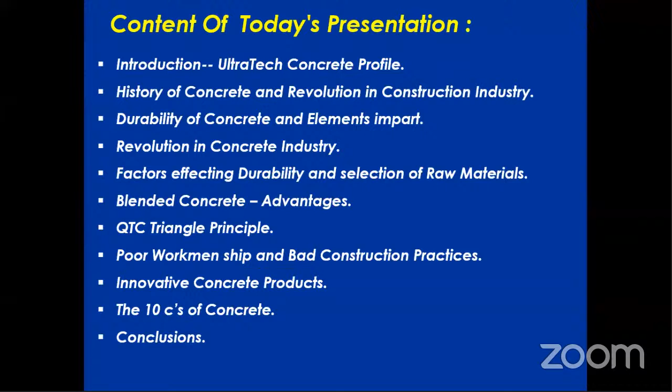Today's content will be briefly these contents which I want to cover. As I am basically from Ultratech Cement Limited unit, Ultratech Concrete, so a brief two slides for introduction of the company's profile, what is the history of concrete, and what recent revolutionary changes occurred in the construction industry that affect the phase of construction and durability of concrete.

And what elements are important to get durable concrete, revolution in the concrete industry, factors affecting durability, and how selection of raw materials will play a major role in getting durability, what is blended concrete and its advantages, and the QTC triangle principle, and workmanship - as we visit 3 to 4 sites daily in our core job profile, I am going to show you various pictures where workmanship is lagging, and how that affects structures, plus innovative concrete products, and finally what are the 10 C's of concrete, and with conclusions I want to conclude the session today.

So quickly I'll wrap up the session.

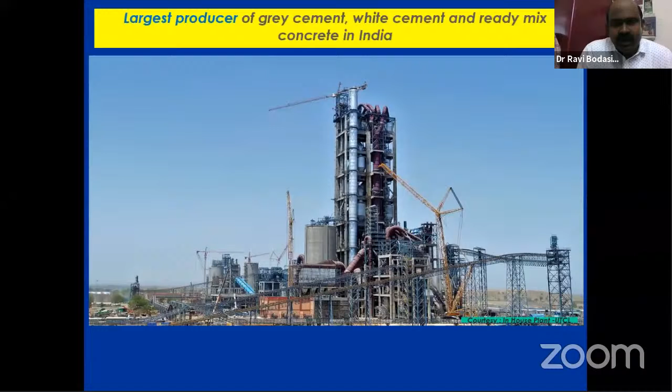We are the largest producer of grey cement, white cement and ready mix concrete across pan India, with 113 million tons of capacity per annum across all our cement manufacturing units, and we have more than 100 ready mix concrete plants in 36 cities.

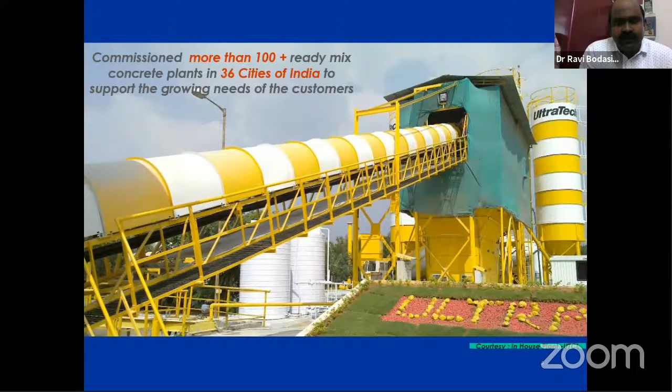We have well established centralized batching plants for giving tailor-made products to our customers, whatever is required, whether specification concrete, product-based concrete, or performance-based concrete. We have all tailor-made products readily available, and we supply huge quantities of concrete for the better building of the nation.

So coming to the history of concrete, the Portland cement was actually invented by J.S. Aspdin in 1824. He was a core engineer from England. So he invented the Portland cement.

Why was it given the name Portland? In the area where he stayed, there is a natural rock which resembles the surface finishing of the cement. So the Portland name was given to the cement, and from ancient days we have called it ordinary Portland cement.

So that makes it the second highest and largest consumable product in the 20th century - concrete. Later, the relationship between the water cement ratio, degree of hydration, and porosity was established by Powers in 1964. As I discussed in the earlier slide about what is high strength, we've moved from the strength concept to the performance concept.

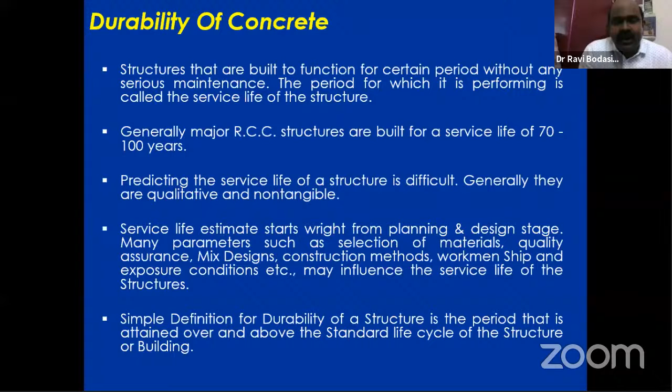So the simple definition for durability of a structure is the period attained over and above the standard life cycle of the structure or building.

So concrete, as all of us know, is a combination - a simple definition being the combination of cement, water, coarse aggregate, sand, fine aggregate, and admixtures.

Following are the factors that will affect concrete quality: the variety and type of materials based on mix proportion and batching. Why? Because we produce concrete in two methods - one is site mix concrete, one is ready mix concrete.

So how the mix proportion is taken care of, and how the batching of concrete is handled at the RMC plants, along with environmental effects and construction practices like workmanship and which technology you use to construct your project, and the target objective of the concrete.

What is the target objective? Target objective is nothing but the grade of concrete, what workability is required, and what is the time to start and finish the concrete.

These are all the factors that give concrete good quality. But if we miss any of these factors, the properties of concrete will immediately get affected because these factors have not been considered or treated well.

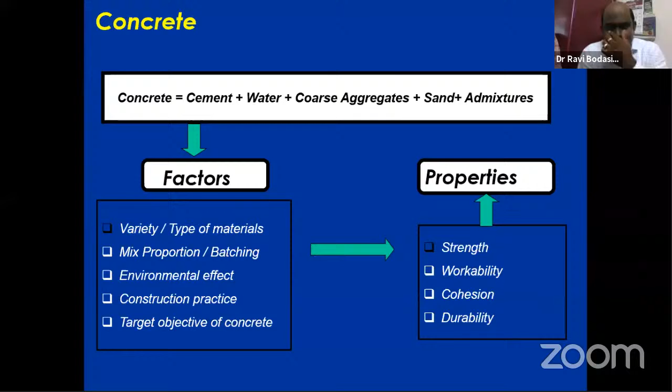So that may cause low strength, workability, cohesion, and durability issues. So these are all the factors. But what are the elements that will affect the concrete durability?

So we are now discussing not a standard concrete. We are purely talking about how we get the durability and how we get the life of the structure above the standard life. So these are the durability factors: the concreting system, and the aggressiveness of the environment.

So concreting system is again bifurcated into materials and process. Why? Because without materials we cannot produce the concrete. The materials involve what is the binder type - binder is nothing but our cement content. Binder content, what amount of binder content you are going to impart in your mix design, what is the quality of aggregates, what type of admixtures you are going to use, and what is the mix design - whether it is designed for M20, M25, and whether it suits the codal requirement or not. These all come under your mix design and materials.

And the process is nothing but how you are going to mix the materials, how you are going to transport, and how you have to place the concrete in the element - compaction, curing, temperature, workmanship, and the aggressiveness of the environment. These are all concrete system.

This will be under control. Why? Because materials we can control, process we can control. This is exclusively something we can correct - the entire concrete system. It lies within our hands.

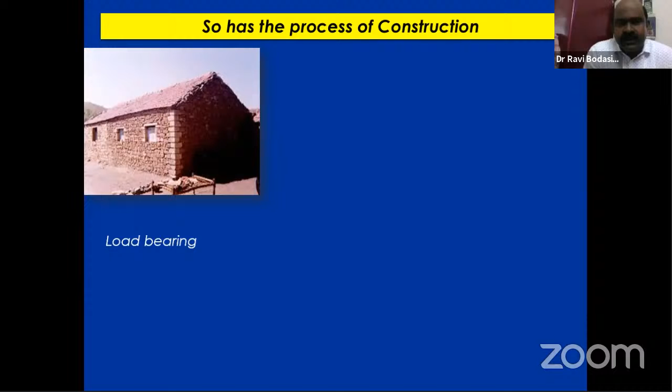Later, from load-bearing, the industry shifted to the framed structure. Framed structure is nothing but our columns - basically starting from footings, plinth beam, columns, slab. From the slab, it is a symmetric structure. That entire frame - first we will construct the frame or skeleton of the structure, then we will go for the other masonry and other conduit works.

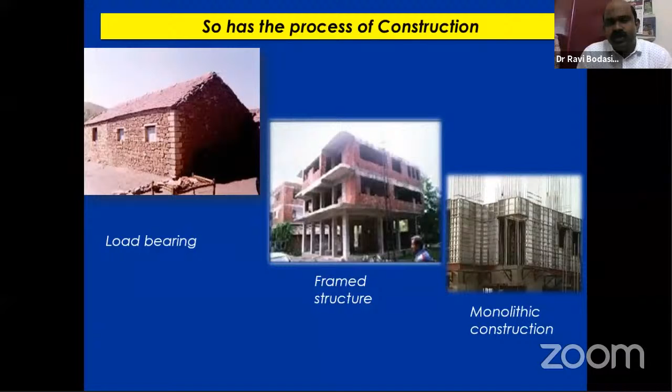And even now, from framed structure, the industry has shifted to monolithic construction. Monolithic construction in simple definition means: if once we have planned and scheduled a time to complete a slab area or whatever wall area element, once the concrete has started, it should be finished off without any joint or obstruction during the laying of concrete. Once you have started the wall, it should be finished without any joints, without any time delays. That is called the monolithic construction technique.

Earlier we used site mix concrete, purely based on volumetric analysis like 1:2:4, 1:3:6, 1:4:8 - that is the volumetric analysis of site mix concrete. Whereas ready mix concrete is purely based on IS 4926 codal practice with weighment analysis. So for 1 cubic meter of concrete, we convert the entire volumetric into weighment analysis - how many kgs of cement required, how many kgs of aggregates required including fine and coarse, and how many kgs of minimum water cement ratio - everything will be defined as per the tables given in the codal practices.

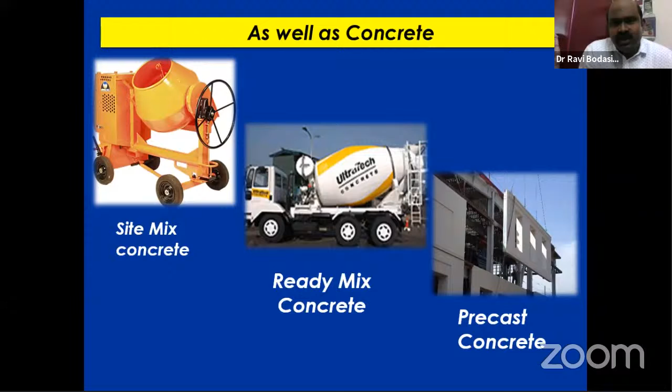So ready mix concrete - now we can see a lot of activities. Even ready mix concrete has now shifted into precast concrete. It saves a lot of time with precast concrete. We can cast our elements - whatever wall elements, even footings, beams, columns - everything readily available at the precast yards, and then transport and fix the elements onto the structure. This is the precast technology, now well established in the construction industry.

So what is the revolution in the concrete industry? As you know, even in 2-tier and 3-tier cities, the apartment culture has been very well suited, and the real estate boom is now looking for high-rise buildings. Huge competition is there in the high-rise sector. In order to stay in this competition, the builders or developers are hard pressed to complete the project as fast as possible.

One builder will think: okay, my co-builder has constructed 11 floors, I have to construct 15 floors, I have to construct 20 floors. Like that, a big competition has resulted, knowingly or unknowingly, where the builders or civil engineers violate various building norms, so that entire violation leads to failure of structures, and even the structures are unable to attain at least the designed service life of the structures.

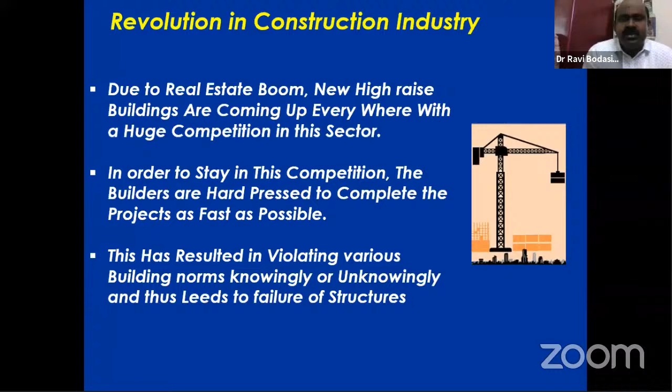So the Indian construction industry, earlier and now. Earlier days there was low demand for construction, and government was also spending low on infrastructure. But now, as you see, AP TIDCO projects, Prime Minister Awas Yojana, and other schemes mandate that every family should have one double-bedroom house. That is the aim of the government, so that every family should have their houses. Availability of land was also adequate earlier, but nowadays land availability is becoming narrow, and that is also the reason prices are high.

Shortage of cement was there earlier, but now, as I said, we are at 113 million tons capacity per annum, so surplus cement production is there. Labor was also cheap earlier, but nowadays labor availability is the toughest job for us as an industrialist, to get skilled and semi-skilled labor. Because of this migrant labor situation in the pandemic, daily our toughest job is how to get the manpower into action. So these are all about the construction industry.

What earlier in India, now what the construction industry in India is looking at: need for faster construction, sustainable and durable construction, latest technologies. We have even appointed multinational consultants from Singapore and other countries for better durability of structures. Various countries have been involved in getting good quality buildings.

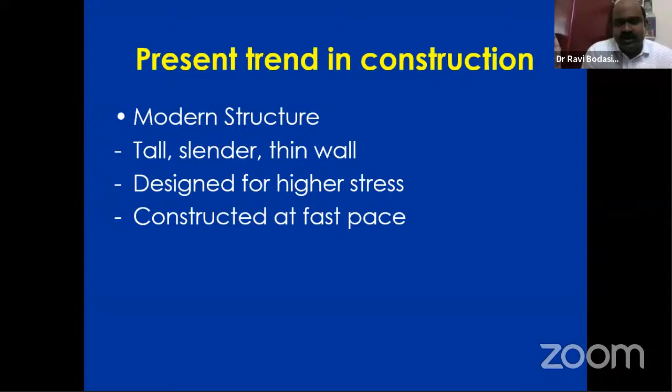Why? Because to get the project done in time, they are looking for high quality, high strength concrete, and the structure would undergo some high stresses. All these, the basic aim of this trend is to construct at a fast pace.

So, the revolution of making concrete over decades. Over decades, standards have been given that normal concrete we can use up to M20 grade - what we call normal concrete. Even IS 456, in its recent revision, says M20 should also be considered as plain cement concrete, not RCC, if it is in a pure coastal region. Then standard concrete is M25 to M35, and high strength concrete - what we normally call M40 and above - denotes high strength concrete. Various buildings and projects require M40 and above concrete.

Then the concept of high performance concrete - as we didn't stop at the strength part, we started looking at performance concrete, and blended concrete came into life, and extensively it is giving better results.

With blended concrete we can get the best durable structures and special value added concrete products. This is purely on application and product basis. If you have some specific requirement in the project, or a specification that wants some particular product, we can produce that product based on the customer requirement and supply the concrete.

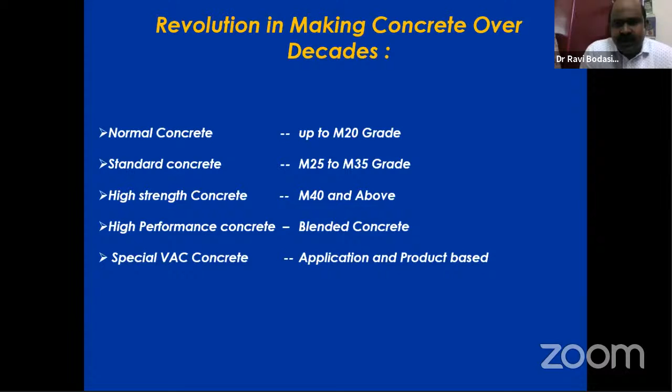So coming to the details of today's presentation: what are the factors affecting the durability of reinforced concrete? These are the major factors which impose the life cycle of the building: design deficiencies, environmental conditions, sulphate and chloride attacks, corrosion of reinforcement in the concrete, carbonation and leaching effect, alkali aggregate reaction, thermal damage, plastic and dry shrinkage cracks, joints, quality enhancement of concrete using blended materials, and finally workmanship.

We'll just go through one or two slides of each component so that we'll have a brief idea about what are the factors affecting the durability of the structures.

Coming to design deficiencies - actually in the case of planning itself, as civil engineers, structural engineers, or architects, first they should study what design is required for the structure, and what tensile strength and compressive strength it requires, so that both can give strength to the building.

It should take care of the entire load coming onto the structure. In metro cities or tier-A cities, after finishing, the owner or developer used to give the terrace on lease or rental basis for huge hoardings. These hoardings' weight, wind load, and dead load will not be taken into consideration by the structural engineer during the design aspect.

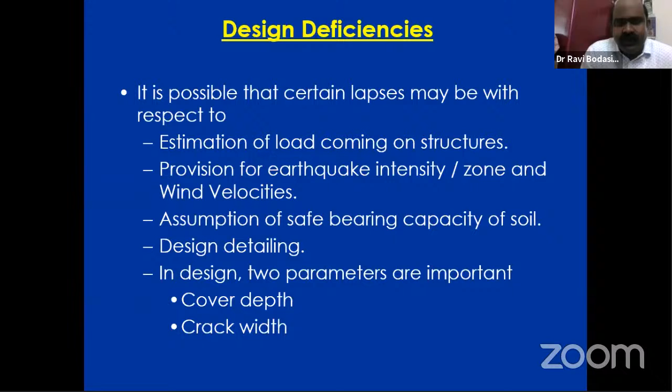These are all factors which are non-tangible and we cannot identify. Even after construction, the structure will take continuous loads throughout the entire designed period, so we cannot assess what stress the structure is facing. So these two factors require adequate care.

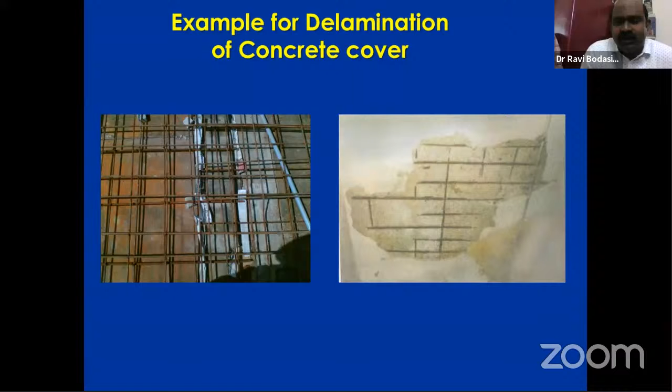You can just see the photographs—the proper cover is not given to the slab, so after de-shuttering, this will be the condition of the slab. So definitely we are giving whatever remedial course of action for the damaged portion, but it won't embed itself and act as a single element. Both will have individual elements and individual stresses, so year on year it requires rectification.

For this, normal cover has clearly been given in the IS 456 codal specification, based on 5 severe conditions. When taking care in the design aspect, we have to consider the criteria that the structure or soil will face. It comes under exposure conditions like mild, moderate, severe, very severe, and extreme. Based on these exposure conditions, we should finalize the cover to the main reinforcement.

If it is mild, a 1 inch cover or less may be sufficient for the structure. Whereas moderate requires a minimum of 30mm, severe 45mm, and very severe 50mm. Extreme severe applies where construction has been done underwater or under sea, like ports and similar projects—this falls under extreme conditions, and we have to go for 75 mm cover for the reinforcement.

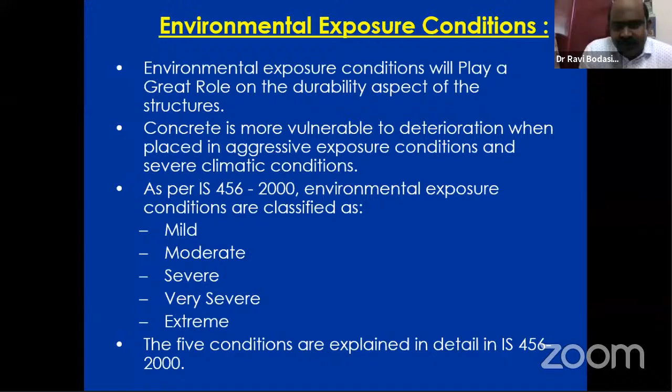So environmental exposure conditions play a greater role in the durability of the structure. Why? Because concrete is the most vulnerable or first affected element in the entire structure when aggressive exposure conditions and severe climatic conditions cause the concrete surface to deteriorate fast. As we discussed about these 5 environmental exposure conditions, the design criteria should meet the requirement of the life cycle of the building.

So coming to sulphate attacks—sulphate in the form of calcium, sodium, potassium, and magnesium all naturally occur in groundwater. Even in soils, some soils, like in any industrial area, because of effluents coming from industry, the groundwater may get affected, and eventually with the groundwater, the soil holding that water also gets contaminated with these chemical contents.

So solid sulphate will not give any impact if that is the reason we are giving our footings—we directly excavate, construct a footing, and immediately backfill the footings. So even in that area, the sulfates or whatever chemical contents are present remain in solid form.

So this solid form will not get that much effect to the structures. But whereas when these are all contents mixed in water, and if water is being percolated through our structures with porous and weak junctions, then definitely the sulfate attack will cause a big problem to the structure, and it will increase the volume of the cement paste.

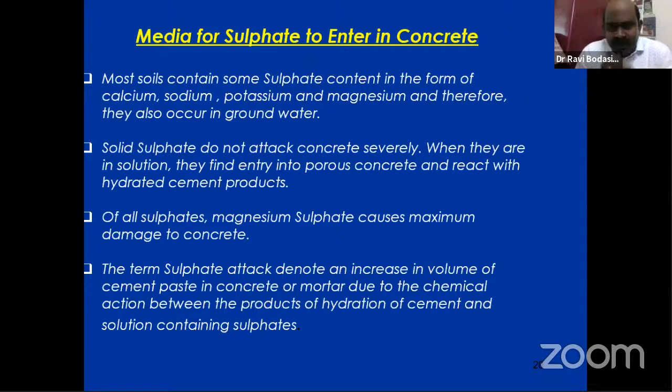So you can see why, because when we are designing, consider the ASC, which is nothing but area of steel versus area of concrete. If the bulging of concrete occurs because of the sulfate, then definitely the concrete surface will deplete from the reinforcement and get departed from it. So because of this increase in volume, gradual disintegration of concrete occurs as the sulfate attacks the reinforcement, and the dilution of concrete takes place gradually. It will start at a slower pace, but after some period the effect will be more.

So it is to be noted that sulfate is the most potent enemy causing lack of durability of the structure. In IS 456, it is clearly mentioned what are the permissible limits, even in the water which we are mixing in concrete and the water which we are using for curing. So all these limits have been clearly mentioned.

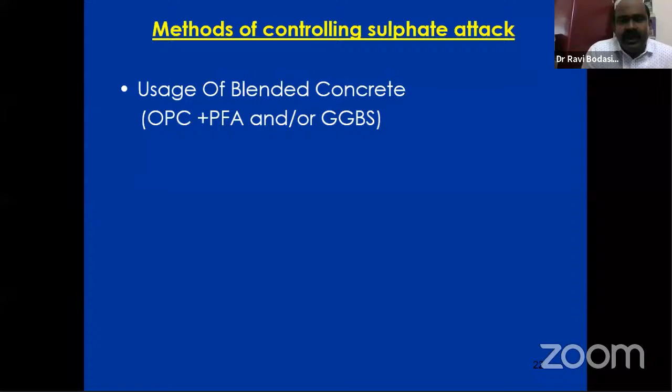So methods of controlling the sulfate attack: use of blended concrete, that is OPC - we can go through detail in the next slides about this blended concrete. Also, quality of concrete, low water cement ratio, well designed and compacted for dense concrete. Once the concrete is properly compacted, the entire entrapped air will come out, and you will have a dense and solidified concrete, so that it won't allow any water to percolate through the element.

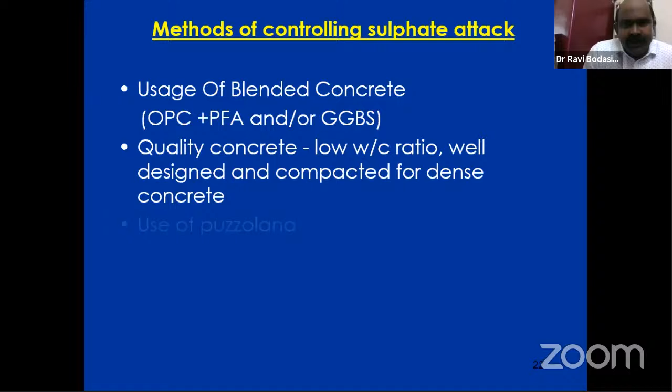So use of pozzolana, high pressure steam curing. So coming after sulfate, these are all the twins which affect the concrete to get more and more deterioration at a faster pace. One is sulfate and the second one is chlorides. Chloride enters the concrete from constituent material, from ingress and diffusion from the environment.

As environment, chloride attacks the protective passivity layer, which is self-generated on the surface of the steel in the hydration process. Hydration process is nothing but when H2O, water, gets in contact with cement, immediately the hydration, the exothermic reaction will start, and the hydration action forms a cement paste. That layer will form over the steel.

As a result of corrosion, the increase in volume causes the surrounding concrete to get damaged. So these are all the limits given: up to 0.2% by weight of cement, chlorides, no risk of corrosion; 0.2 to 0.4, low risk; 0.4 to 1% by weight of cement, moderate risk. If more than 1% by weight of cement, say for example you are using 300 kg, so 1% would be 3 kg - this gives high risk of corrosion.

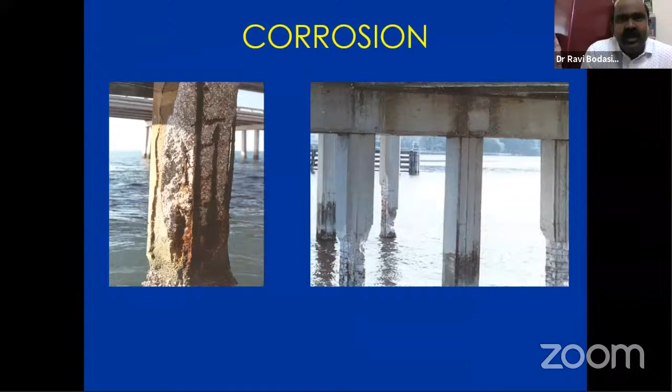So once the corrosion starts, corrosion is nothing but what we can say, it is nothing but a cancer to the concrete.

So this is the phenomena of how corrosion takes place. It's simple: the reinforcement can be tested with an anode and cathode method. So the H2O gets reacted with our cement, and this ferrous oxide will develop more and more. Once the repeated anode and cathode ionic action occurs, it gives more ferrous oxide.

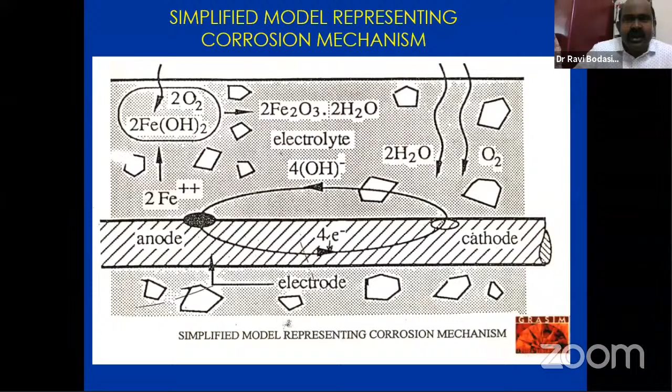It becomes an enemy to the reinforcement which gets corroded. And even once a single oxygen atom reacts, the corrosion plays a major role.

So see the volume, if you can have a look, what is ferrous and ferrous oxide and all these elements - year on year, once corrosion starts with a single Fe ion, after the hydration action, it will react with the moisture to form ferrous oxide, like that. Once the volume goes on increasing, the condition of corrosion gets more and more severe, and after some time, we can only have the impression of the steel on the slab, not the actual steel. The entire thing will get rusted and it will fall down.

So how to get rid of this corrosion? Making good concrete, adopting low water cement ratio, good compaction for concrete, curing practices, and using correct admixtures. Why? Because some admixtures also have some suspended chlorine content, chloride content, and sulfur. So use of correct admixtures for the correct cement you are using - you have to check for the compatibility test for admixtures versus the type of cement you are using.

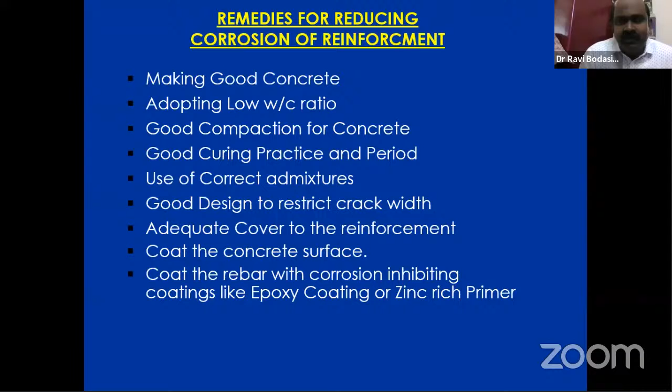Adequate cover is important because the more the cover, the more the lifespan of the structure. Without it, the anode and cathode reaction will start. Even if the cover is more, the time to reach the reinforcement will be dragged, giving a better life of the structure.

The next major factor affecting concrete structures and disturbing durability is carbonation. Carbon dioxide from the air reacts with calcium hydroxide to form calcium carbonate. In presence of moisture, this acid is formed which reduces the alkalinity of the concrete. If the pH value of concrete, generally 12.5 and above, comes down to 12.5 to 9, it immediately affects the protective layer of the steel, and the carbonation action starts deteriorating the steel.

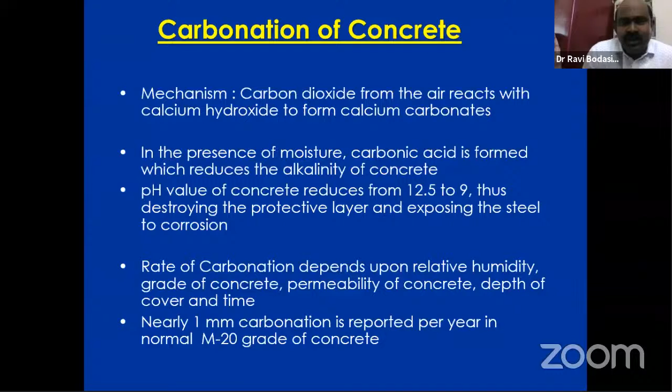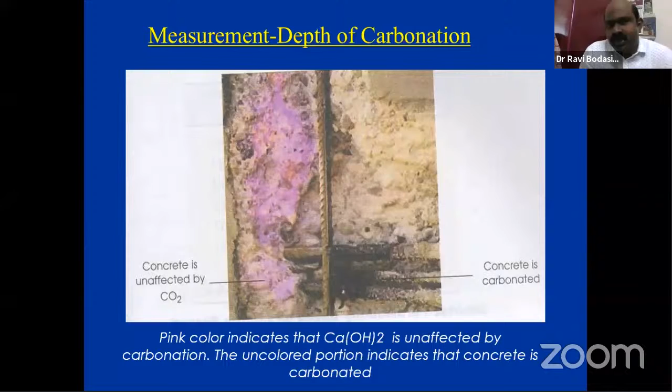So, methods of controlling carbonation: the highest rate of carbonation occurs at a relative humidity between 50 and 70%, so humidity plays a major role. Often this factor is not considered - what is the humidity, what is the wind velocity on the pouring day - it plays a major role.

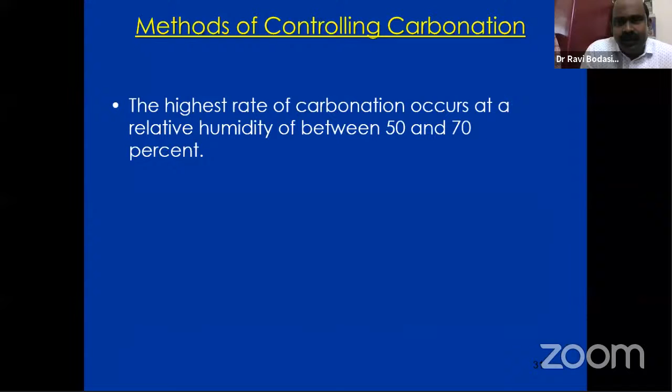Protective coating is required for long span bridges, flyovers, industrial structures, and chimneys, because these structures undergo chemical action inherently throughout all 365 days. So depth of cover plays a major important role in protecting the steel from carbonation.

The next major effect is alkali aggregate reaction. Alkali content in cement reacts with reactive silica of the aggregates used for manufacturing concrete. This reaction forms a gel, and once this gel manifests, it allows bulging of concrete and gives cracks. As we know, a crack is the first door that allows our structure to deteriorate at a faster rate.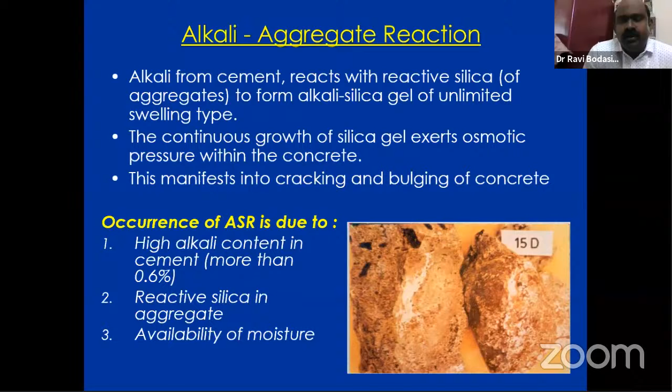Occurrence of alkali silica reactivity is due to high alkali content in cement; as per MORTH specification, it is limited up to 0.6%. Reactive silica cannot be controlled in the aggregates, as these are all natural products which we are crushing and using.

So what is the remedial action to address alkali aggregate reaction? Use of non-reactive aggregates from alternative sources - if the aggregate is more prone to this silica reaction, we have to go for other sources of aggregates or raw materials. Other options include low alkali cement, reducing cement content in the concrete, use of pozzolana, slag or silica fume, and control on service conditions by limiting the degree of saturation of the concrete.

Once concrete is placed, after about 1.5 hours when the hydration action starts, it forms a green state, then plastic state, then hardened state. In this phenomena, some silica reaction occurs. So the degree of saturation of concrete plays a major important role, and this can be controlled by using proper admixtures.

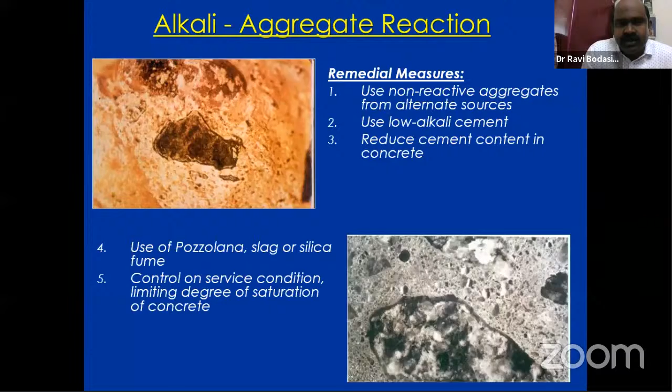Next is the effect of leaching. You can see in buildings, if untreated at the soffit of the slabs, white color patches will appear - this is nothing but leaching. The free lime in the concrete comes out after a certain period and deposits on the surfaces of the concrete elements.

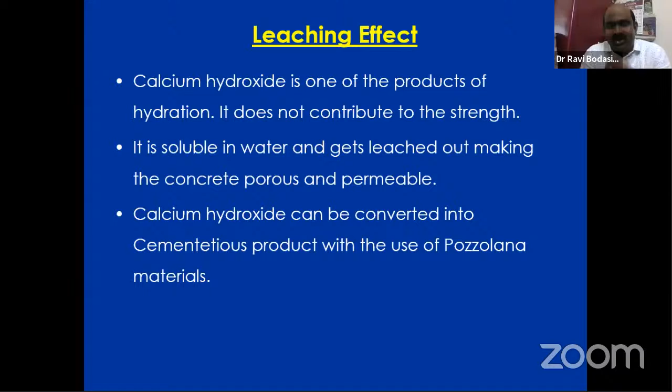Next, coming to thermal effect.

So the temperatures while placing the concrete for huge massive pours, definitely the thermal effects, the exothermic and endothermic reactions, occur in the massive pours and will definitely affect the concrete. This can be controlled while pouring the concrete by considering the temperature of the concrete and by cooling the aggregates and placing temperature. All these things help control the thermal damage, which has a major effect on the durability of the structure.

Thermal cracks develop if the temperature difference between the core and surface of the concrete is more than 20 degrees. Say you have poured a 1.5 meter depth raft. We always look at the surface temperature of the concrete, but what is the temperature inside, inbuilt in the concrete at the bottom layer? That also plays a major role, which is why extra care is taken when massive pours are involved.

So we have to ensure there are no joints and no cold joints, and the temperature should be maintained well within 27 plus or minus 2 degrees while pouring the concrete. For that, what are the remedial measures?

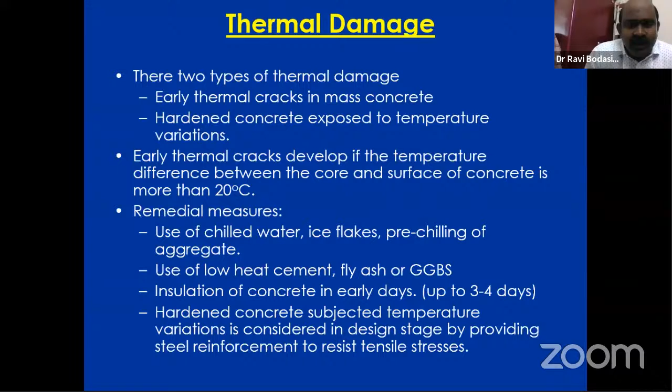Then the major thing we are always discussing is cracks. Cracks are the major prone areas where concrete tends to crack. There is a saying in the civil engineering industry: good concrete always cracks, but how to mitigate these cracks, or how to limit plastic shrinkage cracks, dry shrinkage cracks, or settlement cracks, is what matters.

What is freshly placed concrete? It loses its water because of the internal hydration action, which gives off temperature and causes loss of water. The hydration is similar to how, in summer, we human beings lose our salt and water. Immediately we take some ORS or some liquids to compensate for whatever is evaporated or lost in salts and water. The same phenomenon causes concrete to lose volume, resulting in shrinkage.

During shrinkage, the concrete undergoes some stress, and ultimately when the concrete turns from plastic state to hardened state, the settlements will not be borne by the concrete, as you have to treat fresh concrete like a baby — it cannot take heavy loads. Any undergone stresses will definitely impart cracks which form on the surface of the structure.

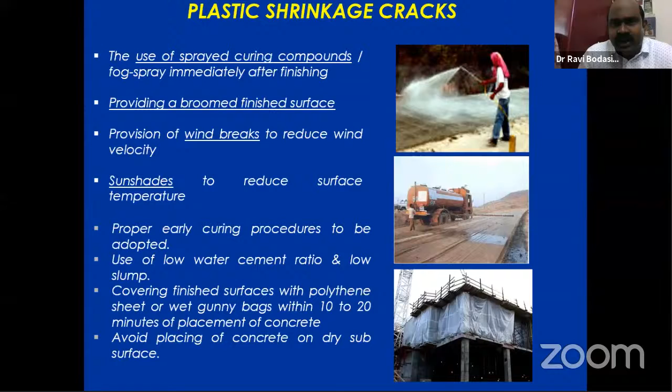Why? Because when we place concrete on dry subsurfaces like roads, the element acting as a subsurface will absorb the water in the concrete immediately after placing, and the water will not remain in the concrete to react with it. That is the reason plastic shrinkage cracks may occur.

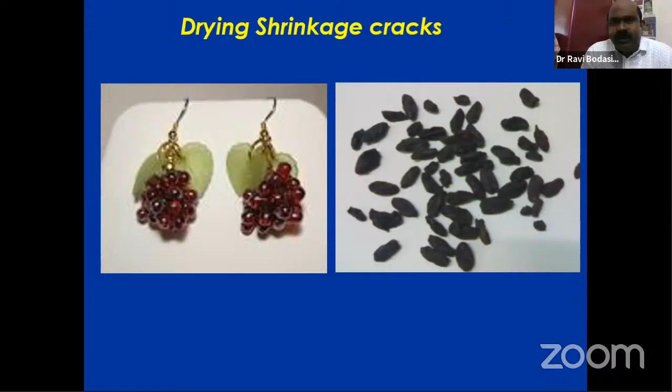Next, coming to dry shrinkage cracks. This picture shows grapes in a fresh state and after losing their water. Why? How the volume of the grapes and the space between them changes clearly denotes the same phenomenon. Dry shrinkage, after losing water volume in the concrete, tends to cause cracks — that crack is called dry shrinkage.

Similar to the hydration of cement, dry shrinkage is also an everlasting process. It is due to the loss of water in the gel pores and the change in volume.

The magnitude of shrinkage depends upon the cement content, the maximum cement content, and the constituents used. Are you using any mineral admixtures? What is the water cement ratio? What is the humidity factor?

All this will affect your dry shrinkage factors. So remedial measures like good quality aggregates and prolonged curing for concrete is mandatorily done for at least, as the code says, a minimum of 7 to 10 days. Why? Because in 7 days it should reach at least two-thirds of the design strength. So for a period of 7 to 10 days curing is required.

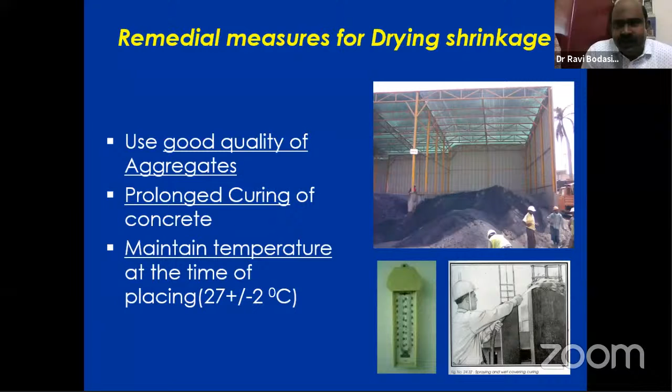But even though, within the next 2 to 3 days we are all forced to stop, because we need to take up the next phase of activity. And as I already discussed, the temperature for pouring is 27 plus or minus 2 degrees Celsius.

So these are the quality enhancements of using blended materials. In the past, only ordinary Portland cement, OPC, was used, but in modern buildings fly ash, GGBS and micro silica are used. These are called mineral admixtures, which we use so that the free lime and calcium hydroxide, which remains untreated, the leaching effect we discussed, is addressed.

This calcium hydroxide again reacts with the pozzolanic material like GGBS. GGBS is nothing but ground granulated blast furnace slag, and fly ash is a byproduct from any thermal power plant by burning coal. GGBS is a byproduct from steel manufacturing. By utilizing these byproducts, we gain the advantage of an eco-friendly and green building concept.

Why? Because common studies say that for manufacturing 1 kg of Portland cement, 0.5 kg of carbon dioxide is released into the environment. Earlier, we used only ordinary Portland cement. Imagine 300 kgs used, then immediately 150 kgs of carbon dioxide is released into the air. So the environment is getting badly affected.

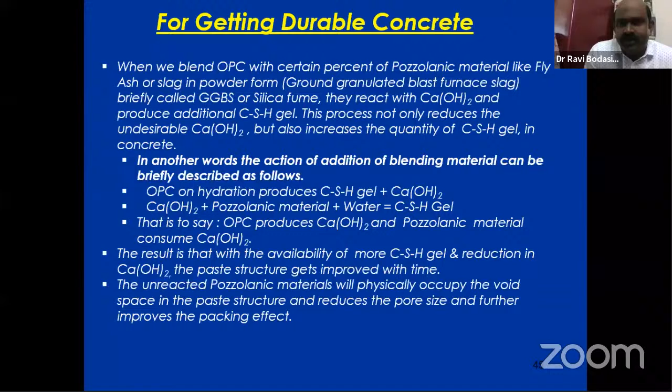So this unreacted pozzolanic material will physically occupy the void space in the paste structure, reducing pore size and improving the packing effect. Once the packing effect is higher and void space is totally eliminated, you get a dense and durable concrete. These are all the advantages of blended concretes.

It has been demonstrated that the best pozzolanic material in optimum proportion mixed with OPC improves many qualities of concrete, such as lowering the heat of hydration. Once the heat of hydration is lowered, plastic shrinkage cracks come down drastically. With no plastic shrinkage cracks, there is no chance for water, moisture, or air to penetrate through those cracks.

It is also good for the thermal effect in mass concretes, makes the concrete more impermeable, improves resistance to sulphate and chloride attacks, improves dissolution and leaching effect, workability, enhances long-term strength and durability, and also reduces the alkali aggregate reaction.

One more point I want to note here. If you are using pure ordinary Portland cement, and after 28 days, for example for M20 grade concrete, you have to use 300 kgs of OPC.

So after 28 days, when we get testing of that hardened specimen, we'll get definitely 20 or 25 MPa of strength. But after that, the later strength pattern will not be there, as the entire pozzolanic material has reacted with water and the free lime remains unreacted.

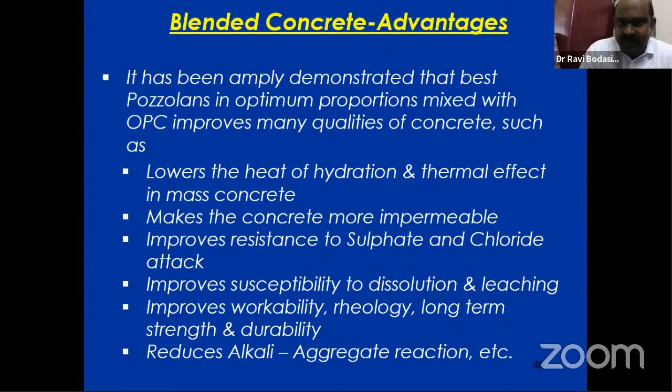The selection of raw materials also plays a major role in getting durable concrete. As already discussed, we require cement, water, admixture, coarse and fine aggregate.

We'll just quickly go through the factors. Cement directly relates to compressive strength and particle size distribution, based on the 90 micron passing sieve. Like aggregates, maximum size of aggregates, shape and texture, and silica content in the aggregates.

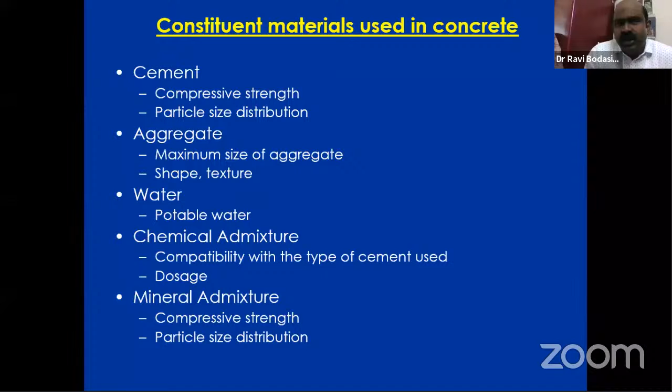Water should be potable and suitable for the preparation of concrete, with proper pH value, and limited suspended chlorides and sulphates. Chemical admixtures and mineral admixtures are also constituent materials used in concrete.

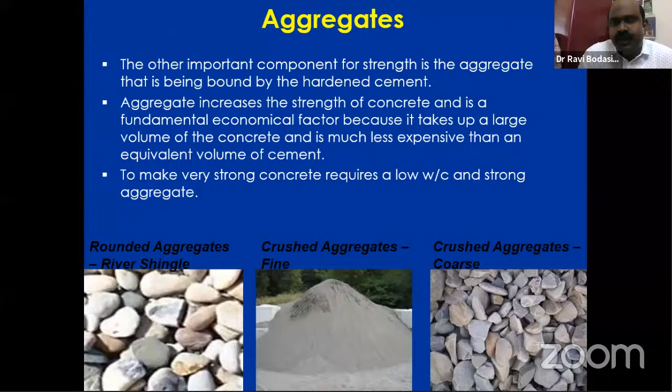Aggregates directly give strength, as even the code says there are 3 parts when preparing a mix design. Number 1, what is the maximum size of aggregate considered for the mix design; what is the maximum cement content; and what is the water cement ratio. These 3 parameters directly impact your design criteria and load criteria, meaning strength criteria.

As for water, we already discussed the pH values and water cement ratio. We should strictly follow the codal specifications to attain water for better and good workability of the concrete.

For chemical admixtures, a lot of companies have these types: Type A, B, C, D - water reducing admixtures, retarding admixtures, accelerating admixtures, and water reducing and retarding combined.

Why these admixtures? Because the maximum cement content per cubic meter should not cross 450 kg as a standard, if it's pure OPC, and we can go up to 500 to 550 kg when using blended products. So if you want to get M60 or M70 grade concrete, and you're not allowed to increase the cement content, the only factor in hand is to reduce the water cement ratio.

What happens when the water content in the mix design comes down? For normal consistency, the cement should react with water and form a paste, which requires a minimum of 28% water. If that 28% of water is not given, it won't form a paste and will simply form lumps.

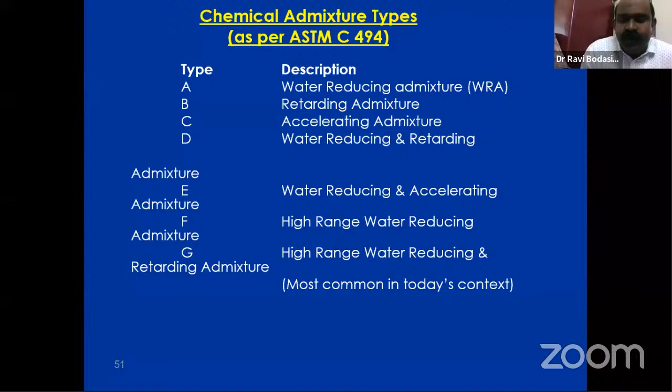That is the reason water reducing and retarding admixtures came into the picture, and polycarboxylate ether is the major core element in the admixture. It gives the workability of concrete by attaining strength at 0.2 to 0.3 water cement ratio.

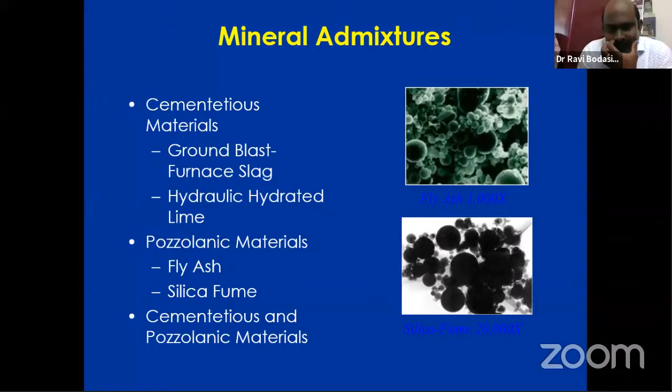These are all the mineral admixtures - we already discussed ground blast furnace slag and lime, fly ash, silica fumes, all these things.

Coming to the major factor, workmanship. Workmanship is one of the most important factors responsible for producing and finishing quality concrete. We have discussed batching, mixing, transportation - all these parameters. We require at least a minimum 100% workmen presence to address the durability of the structure.

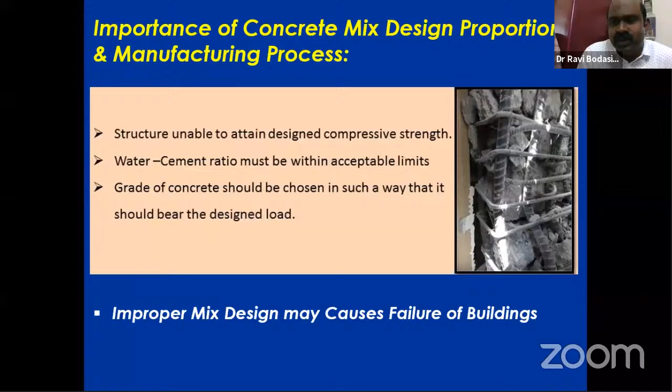If the mix design is not properly followed, you can see there's no 20 mm coarse aggregate in the element. After breaking and chipping, we identify that the column has not taken enough load because there is no coarse aggregate mixed in. These are all the factors that will affect it.

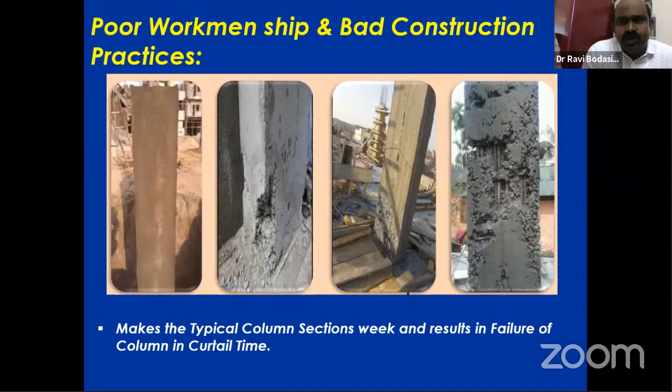If concrete is not properly mixed, not suited to the workability, or not properly compacted, the columns will get more honeycombs. Even after that, any remedial course of action like grouting or carbon wrapping you do, it won't be like the original element which should take the entire load of the structure.

So it is cast from top, and after we are staying at the residences or apartments, if the column gives such a crack, it is highly difficult to get the rectification or get the job done. We cannot control it then, but these issues can be controlled during the concreting itself.

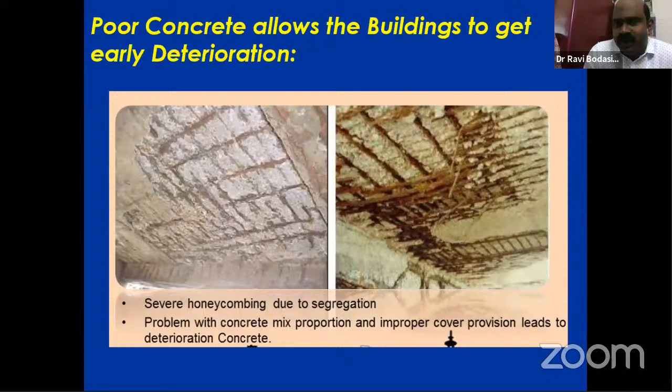Poor concrete cover gives early deterioration of the slabs. After some time, we'll only be having impressions or stains of the steel. No steel is visible at the soffit of the slabs, only the impression of the steel.

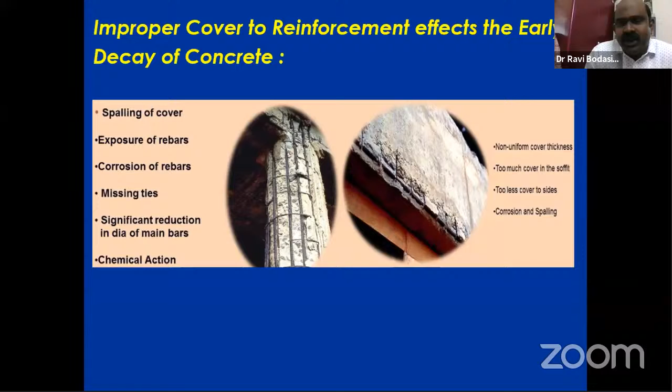So if the cover is not properly done, carbonation action immediately gets started with the atmospheric carbon dioxide, and the structure becomes vulnerable to deteriorate at a faster pace.

You can see improper covers during concreting. That is the reason you can observe, on the top of the slab and at the soffit of the slab, the impression of the reinforcement ties.

Improper supporting system also plays a major role, because enough care should be taken for a period of at least 7 to 14 days. The code says test at 1 day and you can go for the second phase of work, but it specifies minimum 7 days and a period of 28 days. During this 28 days, at least you can average up to 14 days where the load stress will be taken care of by the structure.

Once concrete is laid in fresh state, it will impart load onto the shuttering system. But once it gets hardened, it won't impose load onto the shuttering. If the shuttering is not done properly, it tends to fail, and whatever rectification is done to the damaged portion won't give any result towards durability.

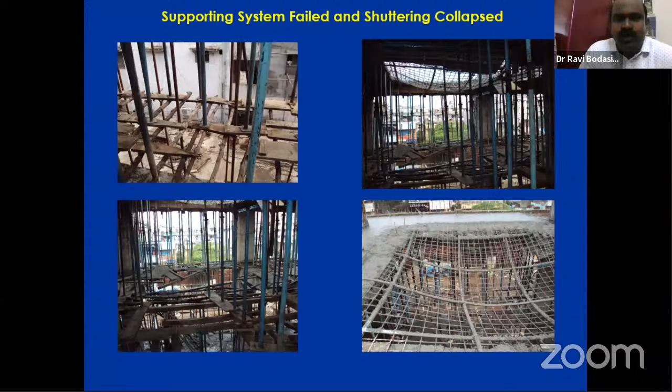So improper shuttering - just imagine, these are all tangible things which we can identify and correct during the construction activity. After that, these things cannot be visualized, so we simply say the cement failed, the concrete failed, or the carpenter made a mistake.

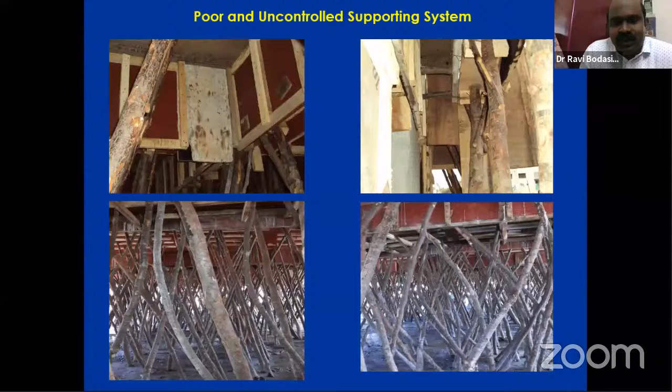But there is no post-mortem available for civil engineers. That facility is given by God only to doctors. If a case fails, they simply do the post-mortem and find the root cause of how it happened. But for us civil engineers, that facility or leverage is not there, so we have to take enough care during the concreting itself.

So see the covering of gaps, the shuttering board gaps. In the hurry and ease of getting faster construction, these things are negligently, knowingly or unknowingly done by the laborer or workman who is directly placing the reinforcement and covering the rods.

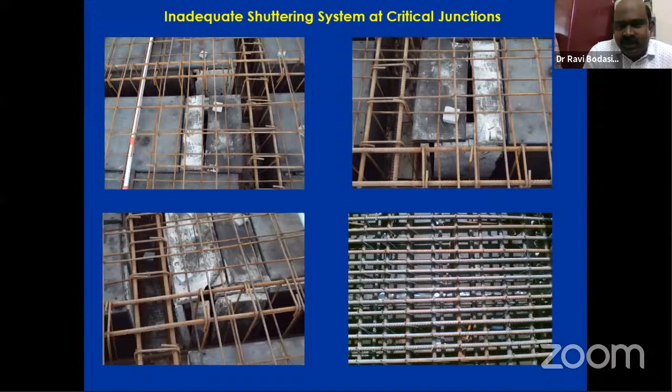These are all bad reinforcement practices which we cannot vibrate properly, so the dense concrete will not be attained, and the structure gets closer to a deterioration condition.

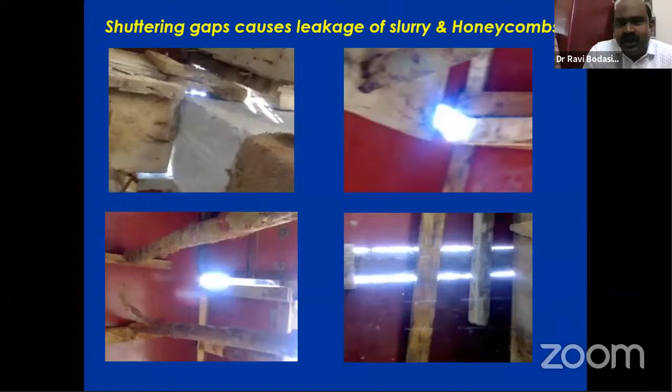These are all gaps through which the slurry will pass, and obviously the plastic coat, the green layer of the concrete, will not come onto the surface. So it affects the structures. You have to ensure a rigid and good quality shuttering system - it gives 200% assurance for getting good, dense, durable concrete.

So these are all improper shutterings, and a better shuttering scheme gives better structures.

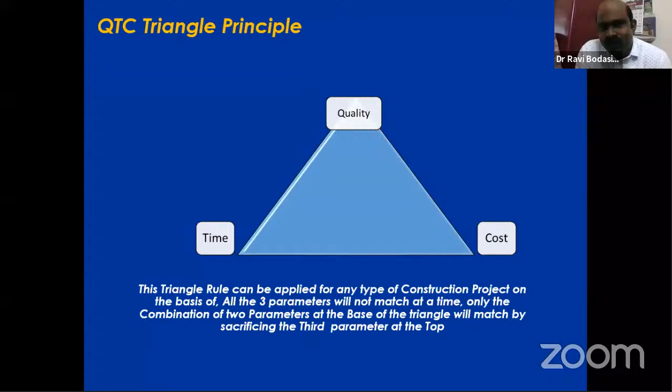Like that, if there is a time constraint and a cost constraint and I want to finish off the building quickly, then only time and cost will match, and quality will be compromised.

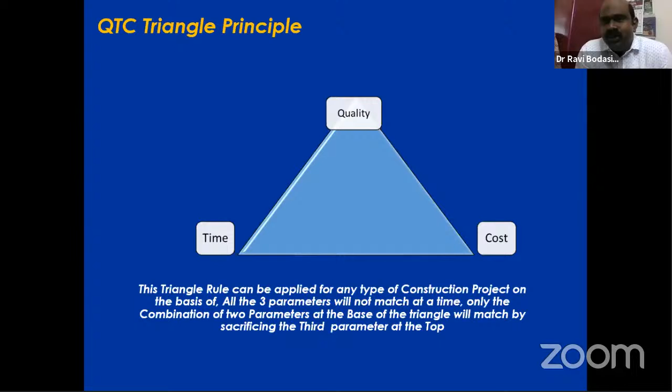Once I finish my presentation, I will go through the videos also. With this self-compacting concrete, the high-rise towers at Visakhapatnam are constructed, and even entire Amaravati, whatever construction has happened till now, is entirely with the self-compacting concrete technology only.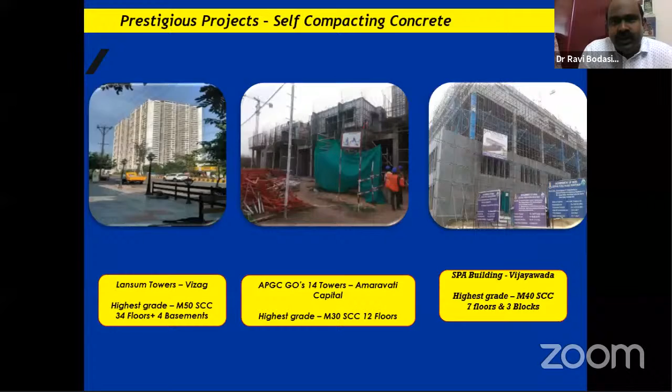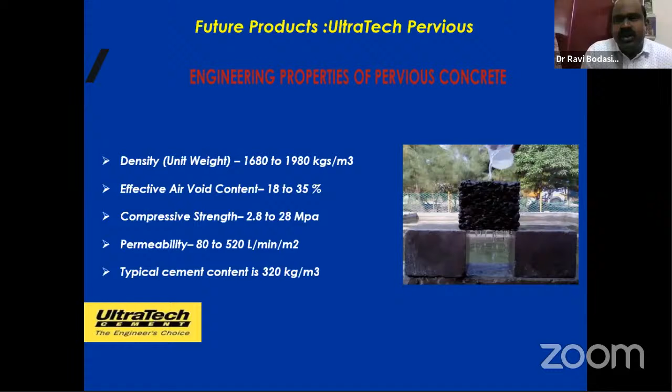Coming to the pervious concrete, why is it needed? Because now in heavy rains, whatever rain we get is a gift of God which we have to protect for the next generation. So unnecessarily, in some parking areas and footpaths and pedestrian walkways, we are doing impervious concrete surfaces. If we can replace these impervious surfaces with pervious concrete, definitely the rainwater will percolate through that concrete and recharge the groundwater table. I will show this video also after the presentation.

Earlier we used to have wells, then the hand pump bore wells, then the motor, electrical motor bore wells. But after some time, if the groundwater is not sufficient in the underground layers, then definitely 100% we will have to procure water that should be manufactured from industries.

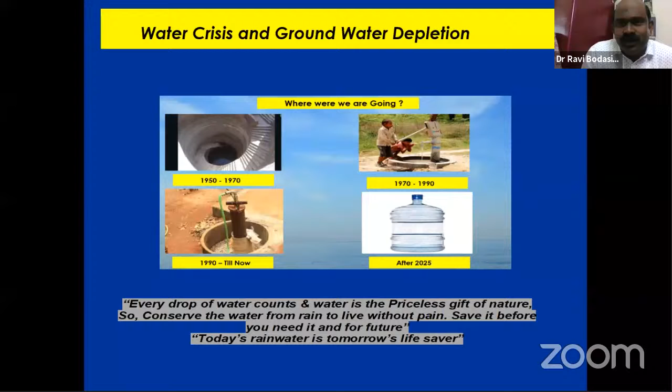So, to minimize building failures, we have to do proper soil investigation, study of groundwater table, no compromise on quality materials, accurate water cement ratio as per the grade of the concrete, and try to avoid fast phase of construction.

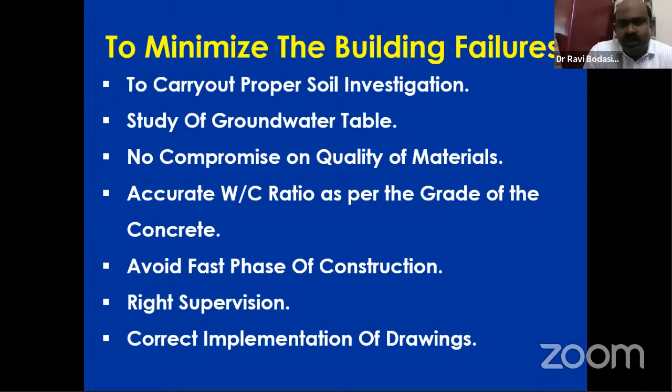Even if you want to go for fast phase of construction, you have to adopt the latest trends, latest shuttering schemes, latest construction methodologies, and right supervision and correct implementation of the drawings without allowing any sort of deviations. With this, the 10 C's of concrete play a major role for getting good durable structures.

With this, the conclusions are: imparting proper training to the workforce at sites regarding the latest trends in construction technology, and keen supervision should be there right from execution to finishing.

The drawings and the shuttering scheme should be followed, and good construction practices should be adopted by using good quality raw materials and latest construction technologies like precast, the Mivan shuttering, and even plastic shuttering which is well advanced in Western countries. These type of techniques we should adopt, and periodical maintenance should be done for the buildings by analyzing any deformities.

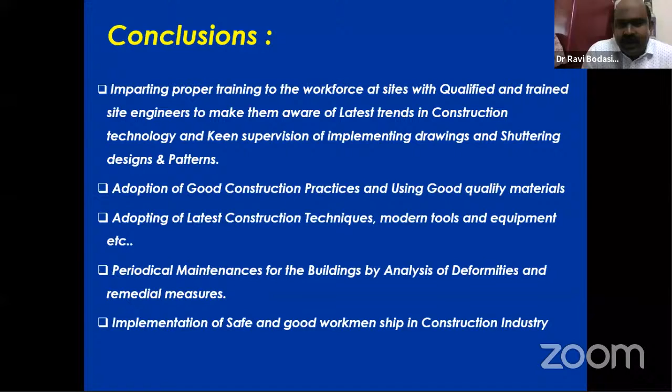Immediately you have to go for remedial action and implement safe and good workmanship in the construction industry. Good quality workmanship of concrete or materials, what we have discussed, with good construction practices, definitely we can have durable structures, because every construction is a different ball game.

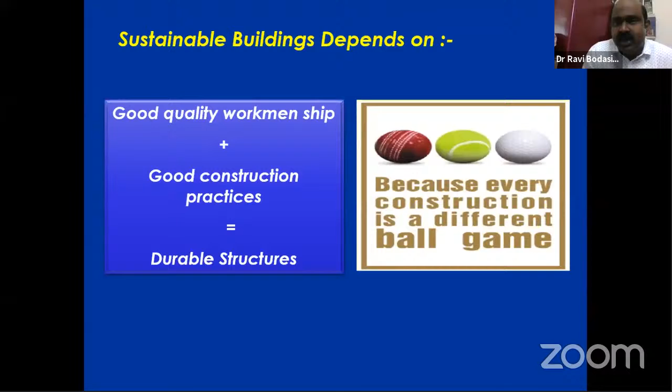We cannot play tennis with a cricket ball, or play cricket with a golf ball. Whatever construction you are going to do or adopt, you should select the right design factors, right construction practices, good quality, right materials, so that definitely we will get durable structures. With this, let us all join for constructing a better future by constructing world-class durable structures.

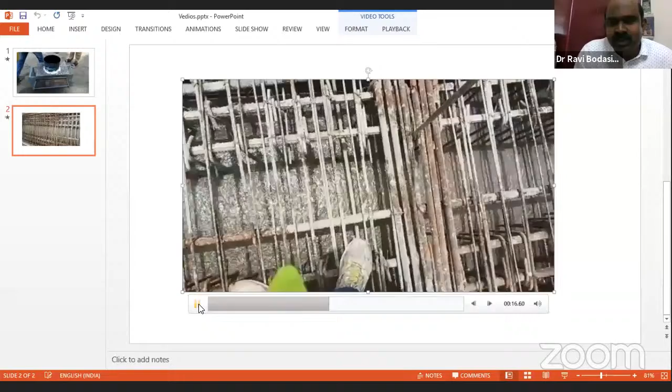This is free flow concrete. That is 18 meters the length of the beam. Imagine what is the live load, the manpower that has to handle the concrete. We have laid the entire beam with only 2 manpower. Earlier, there was a huge problem for manpower. Now, the industry is facing a huge scarcity for manpower.

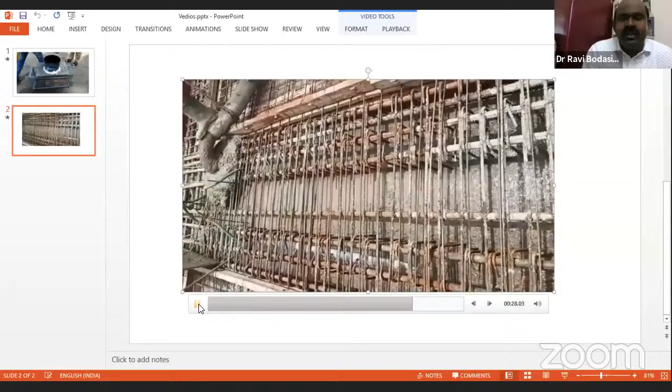So the design of self-compacting concrete, by its own weight, it will flow and fill the element, so that the manpower can be eliminated and the vibration can be eliminated. Any sort of deformities can occur, because even if you give excessive vibration, it definitely tends to crack. So the vibration should be there, the compaction factor should be there. With all these parameters, it has been invented, like free flow concrete.

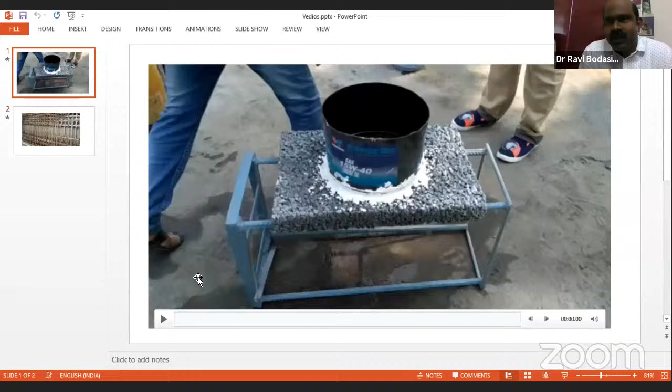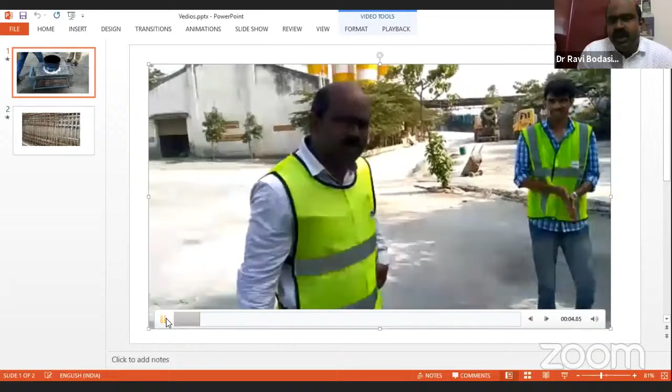Coming to pervious concrete, which we have discussed for getting the next generation's water tables at the ground level. Once the rainwater percolates from the pervious concrete element, it will recharge the groundwater table. You can see the entire water, imagine that is rainwater, and the entire water is percolating from the specimen of pervious concrete, and it is reaching the ground.

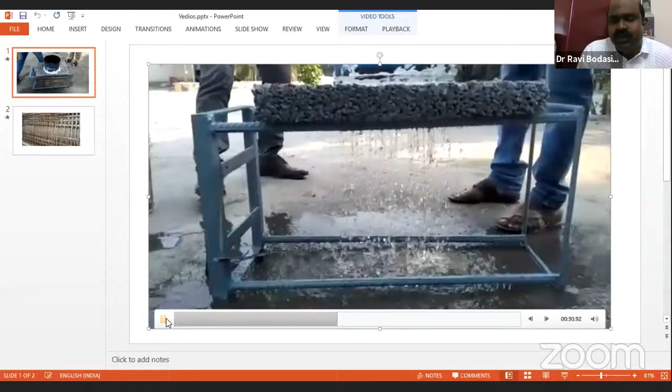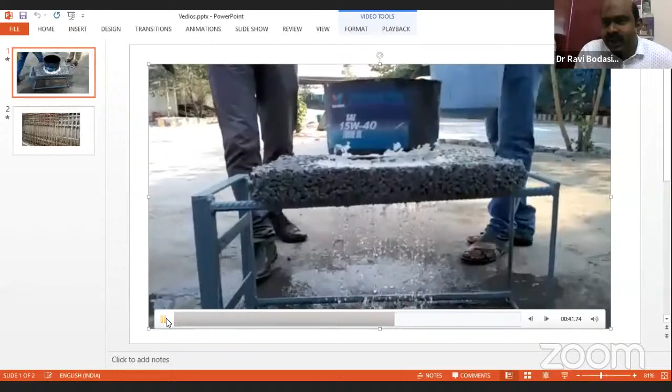So it is nothing but a no-fines concrete. It can be adequately used at parking areas. Even this pervious concrete, we can design up to M20 grade, so that any parking lots, walkways, jogging tracks, and central park lawn areas, we can design this pervious concrete so that the water table can be sustained. As we cannot produce water, it is purely dependent on natural resources, given by the gift of God only.

With this, I want to conclude my today's presentation. Once again, I thank Dr. Girish sir and Prakash Rao sir for this wonderful opportunity. I want to put a note that all are eminent speakers and professors who have been part of this yesterday and today, but I am an industrialist, not at all from the teaching profession. If any mistakes are there, please kindly excuse. Definitely, I'll improve further and give a good deliverable.

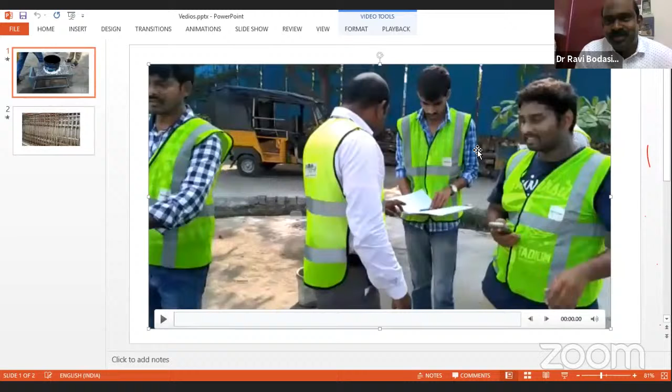Once again, thank you so much for your patient listening, sir. Thank you. Yes sir, thank you. Thank you very much, it's a very nice presentation, sir. Thank you, sir, always. We are doing this a couple of times already with Ravi Kumar sir.

Really, we are very thankful to you sir. It is a very nice presentation, and thank you Ravi Kumar Garu for giving very good info to all the members. Actually this industry institution interaction forum is mainly meant for persons like you, because we the academicians need some practical aspects or visualization. We need it. I'm sure you did the best, and thanks a lot for the delivery of a nice presentation. Absolutely very good presentation sir, with all the videos etc.

Really wonderful, thank you once again sir. We need your support in future as well. Sure sir, definitely, so that your practical exposure should be helpful for the student community as well as other practitioners. Yes sir, even I am closely involved in the APSSDC sir, AP State Skill Development Corporation. So I'm very good, weekly sir, once I used to take the classes also. Very glad sir, so I will take the contact numbers. Sure sir.